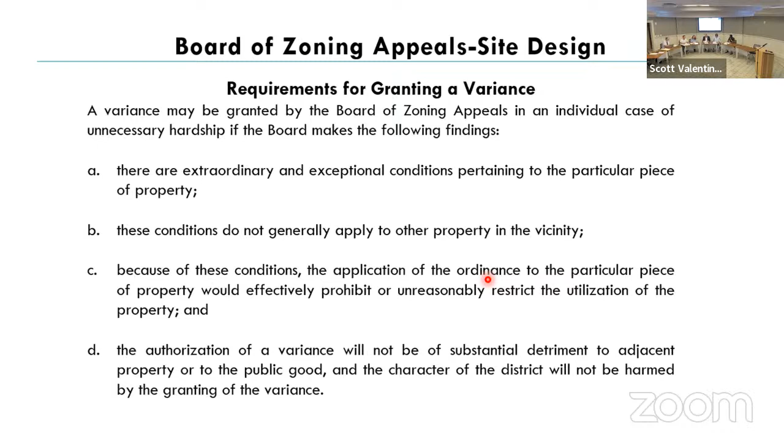So our first item on the agenda is item A1, which is a review of the minutes from the July, and the August, September, yeah, September 6th meeting. Has everybody had a chance to review the minutes? Are there any questions or changes required? If not, is there a motion? I make a motion to move to.

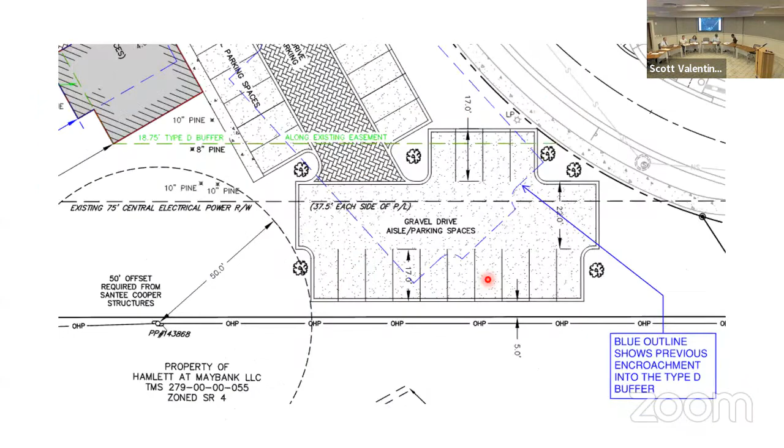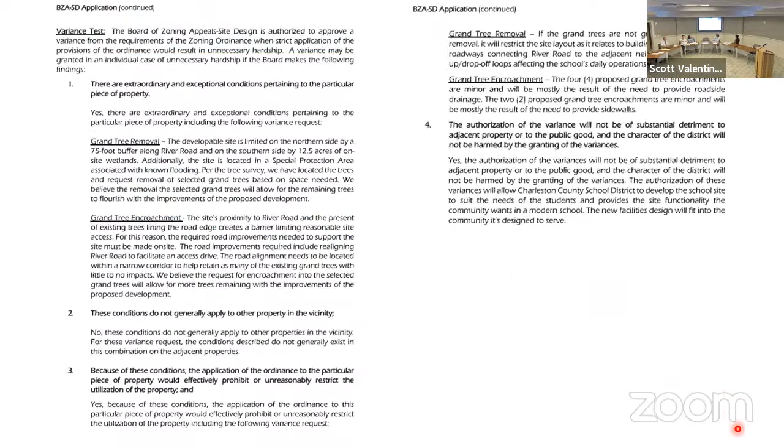Okay, River Road, James, or Johns Island. This is the application, and their letter explaining hardship. So we heard this case in March of this year, and I'll explain why it's back.

This is the residual lands within the Swaggart's Landing neighborhood district. That's a district where it's by right if you meet all these criteria, and you have to reserve an area that is to be developed as a mixed use district. Schools are permitted in that district, so the neighborhood is basically built out. I think there's a couple of lots yet to be built upon for single family homes, but as you can see, this area has roads stubbed out to it for future development.

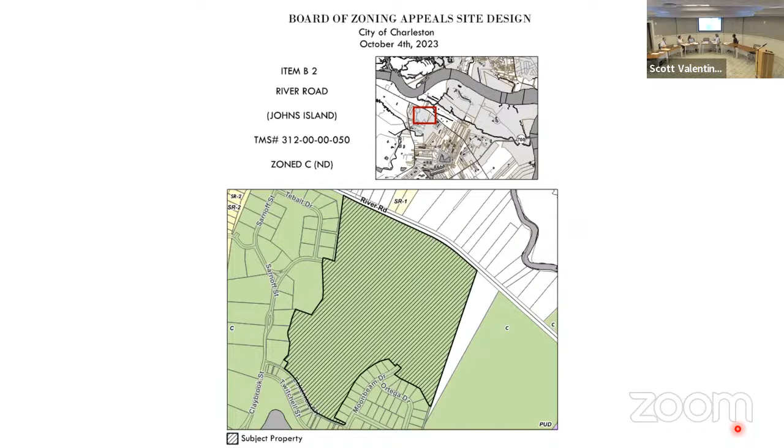Zone conservation, and that's a zone district that allows the neighborhood district to be developed by right. So you can see, this was pasture land about 20 years ago when the neighborhood district came to be and the original layout occurred. But the cattle left and it's now young pine, but there are a lot of grand trees scattered about, and a freshwater wetland, obviously.

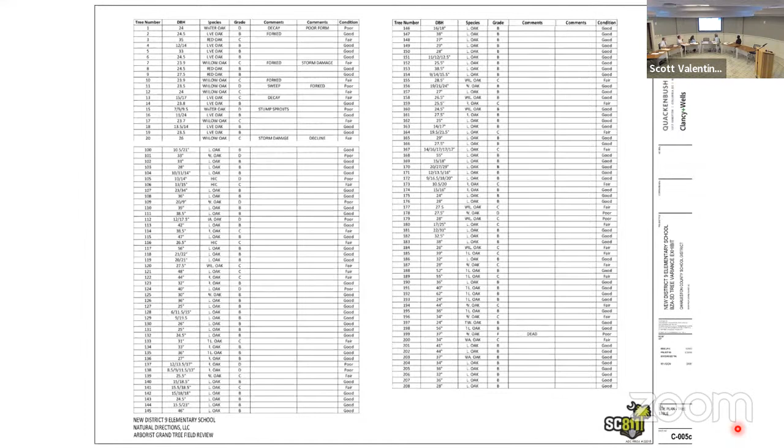This is just the grand tree master list of trees on site. So this was the previously approved site plan, and I'm going to use my little red dot. As you can see, in this scenario, we were introducing a roundabout that would connect this small piece of public road to the River Road roundabout planned. And then the school, obviously, and this would be a public road connecting over to this public road. And this is a bus lot, and at the time employee parking was going to be here. The bus employee office, and then the rows. Note that with the circle, the entrance to the parking lot was here.

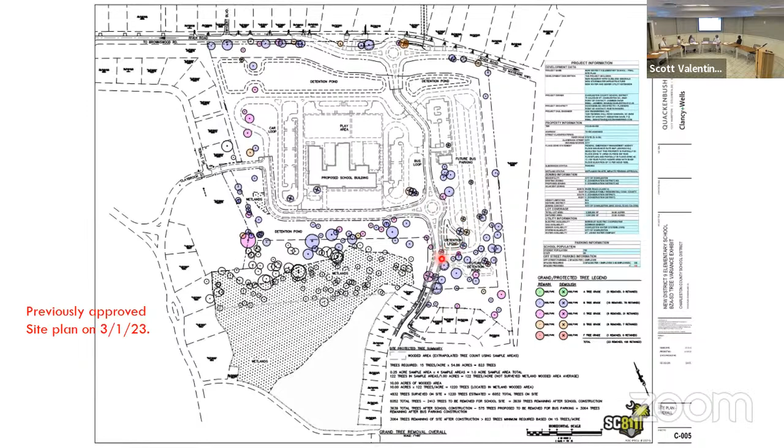But with the growth of the wetlands, that kind of tinkered with the existing layout. Unfortunately, the city's okay with the three-way stop public road, but then they'll have their bus entrance off of that intersection there. And in order to get as many buses and the capacity, they moved the office down and then the employee lot into this grove. And again, this road, if you were to try and swing out and miss the wetlands, there would be a pretty significant impact to the land use as well as grand trees.

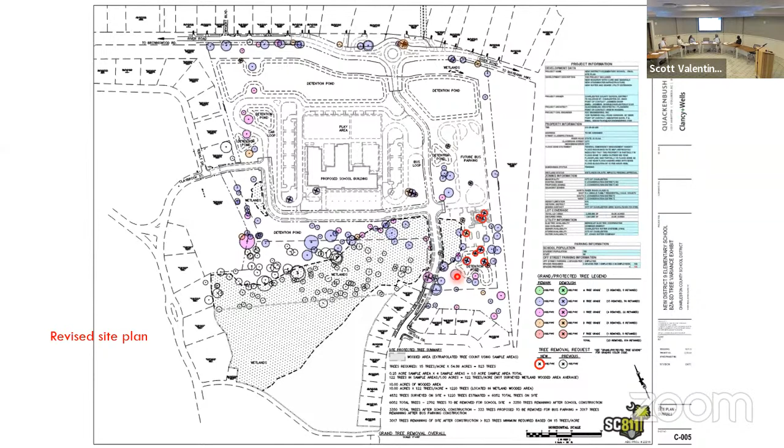So the 8 trees are those in red, and that's due to the change in the site plan. So again, the trees that were previously approved with the driveway here, and you all conditioned that some trees be preserved, and that was in March. This is now October's layout, and this is a low point in the road, obviously a wetland, and it kind of drains down toward the connection point.

So they have to get water off the public road, and they can't bring in massive amounts of fill to get it to go toward the outfall, which is this pond. So they have to weave it through, store it a little bit, and then they'll be able to move the water east.

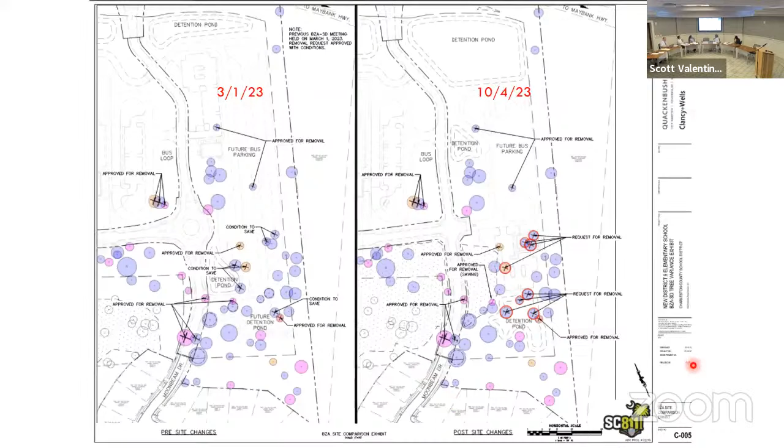I'll explain a little further. I was not comfortable with the request. So again, this is just a blow up of the 3-1 layout, approved for removal, condition to save.

Obviously, the road was going through there without the wetland encroaching south. And then, of course, the new layout - that's what they presented.

So just again, to why just 8 trees, there's a couple X's here, they were previously approved.

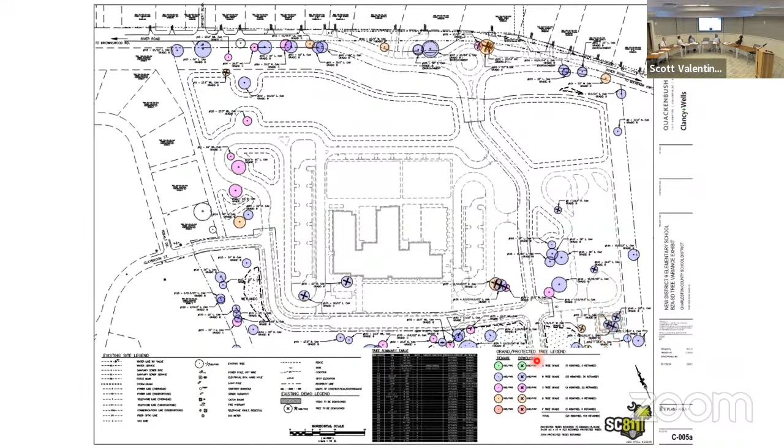So this is the exhibit with the tree numbers and the sizes. Again, you can see this is due to the sheet size, they kind of cut it off, but this is the new layout, the office. And this is the red - I'll explain the green, I'll explain, but they're the 8 trees being considered tonight.

So I blew up the top half. We have the bus entrance, the secured employee parking and the office. And then the buses will head into this area. We have a required buffer.

One thing I did fail to mention, go back to this - this line represents a conservation easement. That was agreed upon with the meetings with the neighborhood and what have you to create a buffer against those residents. So there's that constraint as well.

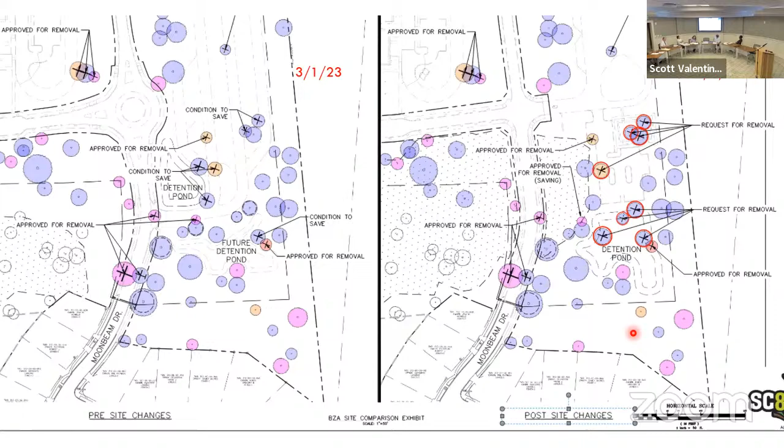So these are the 3 trees in the building: 149, 151, and 150.

This is the lower portion where they propose the pond. 4 Bs, 1 C, or 1 D.

I wasn't comfortable with that, so I put pen to paper, suggested a few things. Sebastian with ADC came back with this, and I'll be supporting this. So we sacrifice a 196, which I do not have a photo of, but we saved 3 Bs.

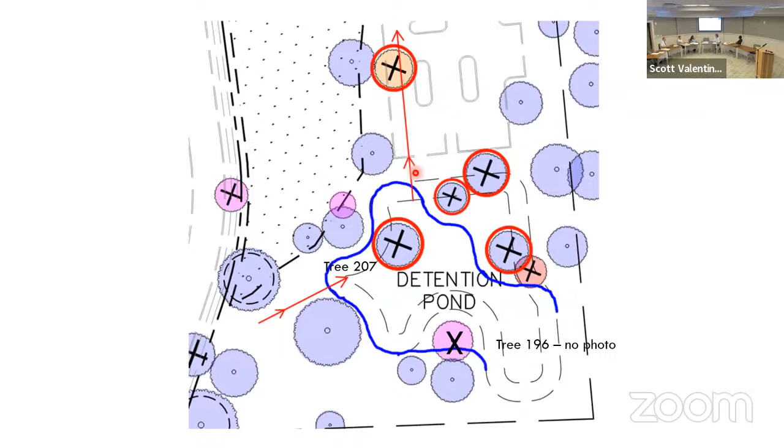And the pipe would come from the road through here into the storage and then head east into the outfall. That's tree 207.

So staff recommends approval with the condition to plant 194.5 caliper inches of native canopy trees on the project site. Must preserve tree 5, 6, and 204. Must use 4-foot chain link fences, tree protection barricades. Must have a certified arborist treat both grand and protected trees within 25 feet of any construction. And the landscape plan to be approved by DRB and tiers.

Right, thank you, Eric. Question.

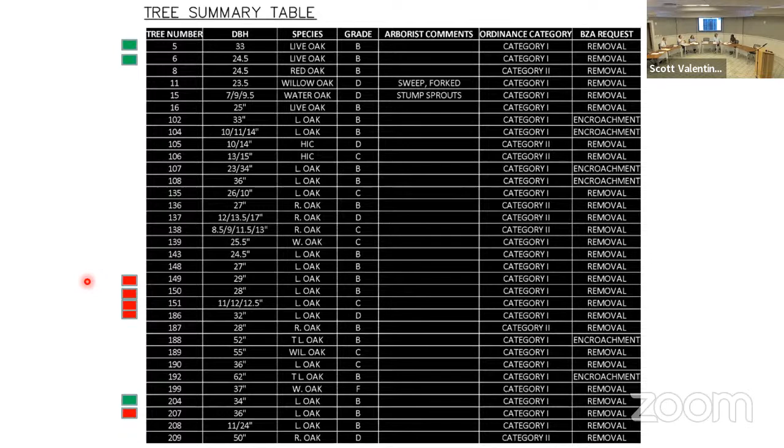So the dissection of the wetlands, is that a bridge over the wetlands? No, sir - I'll let the applicant speak more in depth, but it's my understanding, when you get into wetland impacts, there are certain thresholds you want to try and stay under, and they're staying under the required threshold, not to delay the project months out. But I'll let her explain.

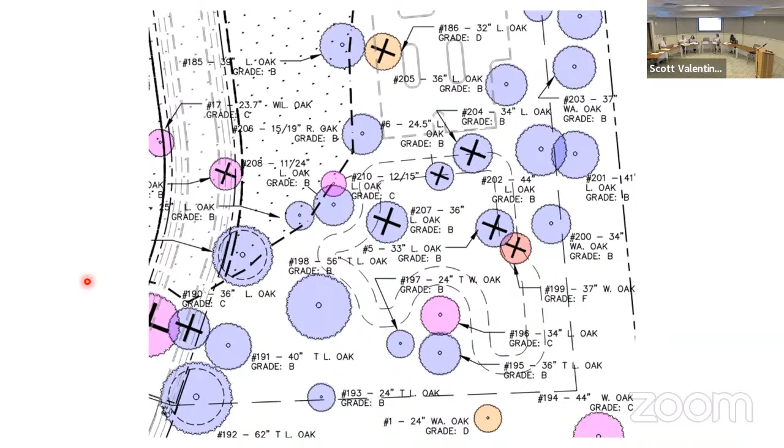Good, okay, thank you. Is the applicant present? Excellent. And I'll ask real quick, is there anybody present that is opposed to the application?

I'm Sebastian Davis with ADC Engineering. We're the civil engineers.

In general, this project came before you all, and we had a different layout, which actually had more buses stored on it. We went back and talked with the school district, and they agreed to sacrifice a number of buses to reduce the area that we were going to impact. So by doing so, it helped us come up with this particular plan.

So we did shift the bus parking - we started back a little bit. With more buses, there'll be more bus driver parking, so we had more bus driver parking on the northern half. By making the buses smaller, we were able to fit a smaller number of bus drivers in a smaller area.

The main constriction and the reason why we came back, as Eric had mentioned, is because of the growth of wetlands. If that had not happened, we would have kept with the current plan. So we tried to pivot and find the best solution to fit the smaller building and bus parking in the smallest area that we could, but also preserve the minimum number of buses the school district needs. We looked at all the different options about how to drain the low area, which does need to be drained to be serviceable. So we looked at it and came up with this option.

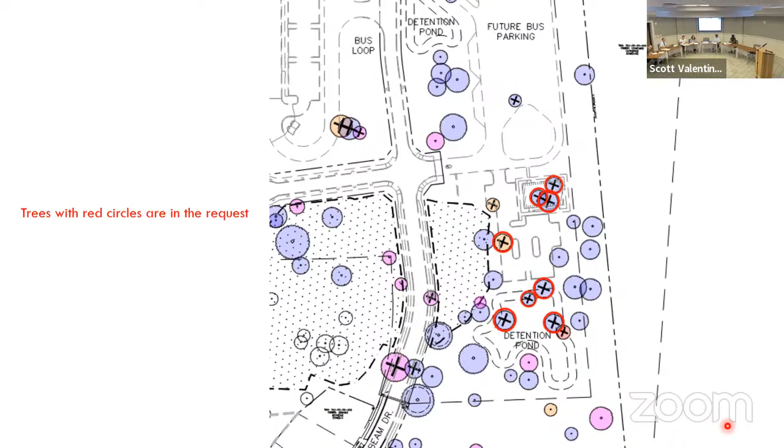I make a motion to move to approve with staff recommendations - that's 5 trees on it. I will second that motion. So the motion for approval by Amanda Barton and seconded by Paula Summers.

All in favor of the motion? In favor. In favor. In favor. Any opposed? That one is approved 4-0.

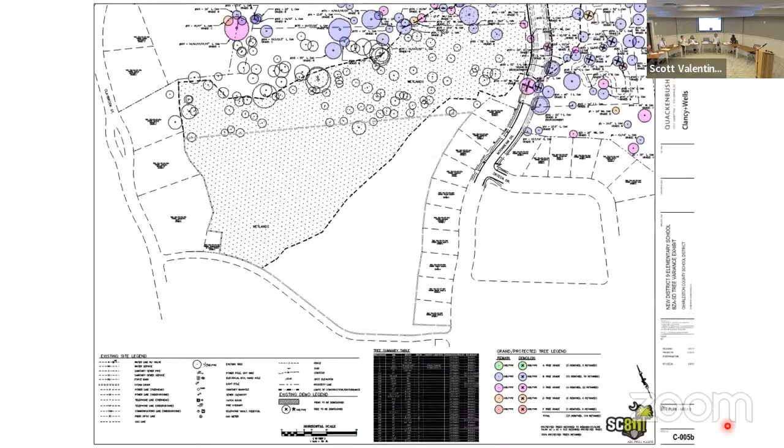Excellent. Would somebody let Jeff know? I guess he's allowed to come back in. Thank you, thank you, good citizen.

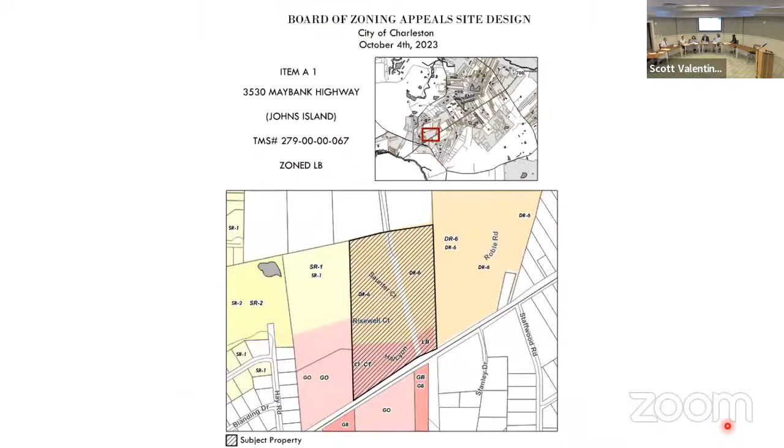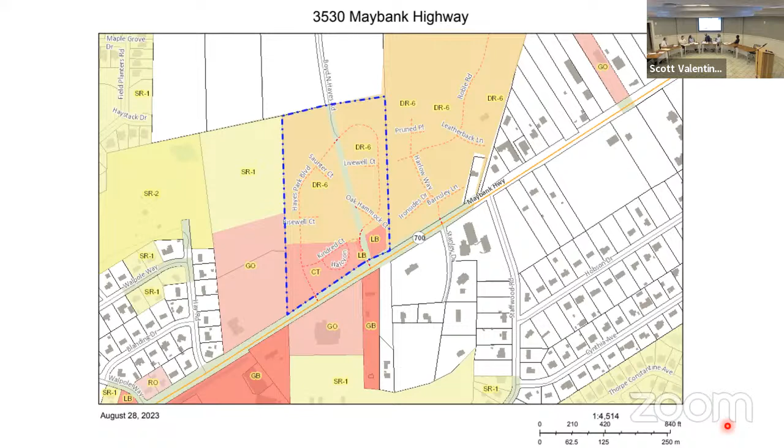Here's the application. The site is known as Hayes Park. So you've got residential, diverse residential, in the rear portion of the parent tract with a wonderful little village-like setting up front, commercial village CT, and this particular piece is zoned LB. This is it before all the construction activity began.

Note the existing 75-foot Berkeley Electric Co-op easement that runs on the eastern property line. This is a view of it from the street. The property line runs right down the middle of this easement. The property to the right in this image is also diverse residential and currently under construction - Middleburg Properties.

So this was the master plan brought forth, and I'll explain. In this plan, you see the proposed building was not encroaching into the Maybank Highway buffer. But at a later date, this came back to the Board of Zoning Appeals, and due to the curvature and geometry of the new road, which was like realigning Boyd Hayes Drive, a dirt road servicing a lot of residents behind this project, it made this little commercial piece a little odd shaped with the easement.

So they brought forth a variance to address two buildings encroaching into the Maybank Highway buffer. The one on the left, which is now constructed within that little village, and then this one - they didn't really have a use, but they figured with parking behind it, which DRB and the city wanted and would encourage, they brought that building forth.

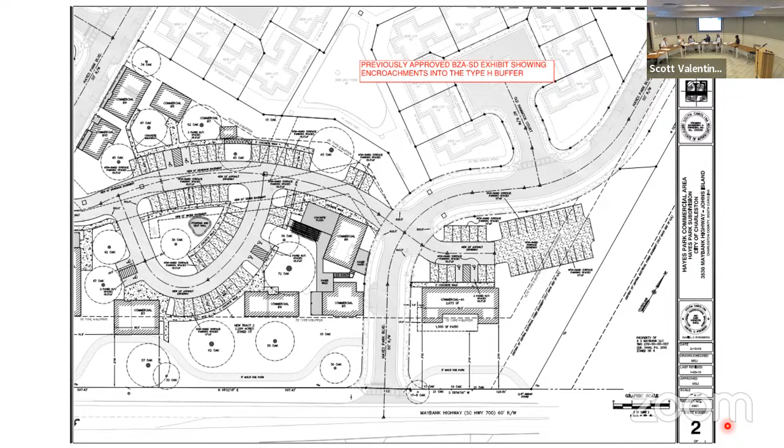They were just kind of moving forward, wanted to make sure they could get a building to encroach slightly into the Maybank buffer. Now that they have a developer looking at that property, the idea is for, I believe, a restaurant. Note that this building is about 110 feet long versus this one that was 82 feet long, but I made them overlay the previously approved encroachment into the buffer onto it, so the portion of the building in the Maybank buffer matches.

But now we have this incompatible zoning issue. To meet the parking requirements and to have a viable overall commercial district there, they are seeking approval from Berkeley Co-op to improve the easement into some parking. So that line with the green lettering on it is the buffer - you can see the 2 or maybe 3 points of the parking lot that touch almost on the property boundary or the right-of-way line. That's where they made some adjustments I've already seen to meet the 5-foot landscape strip there.

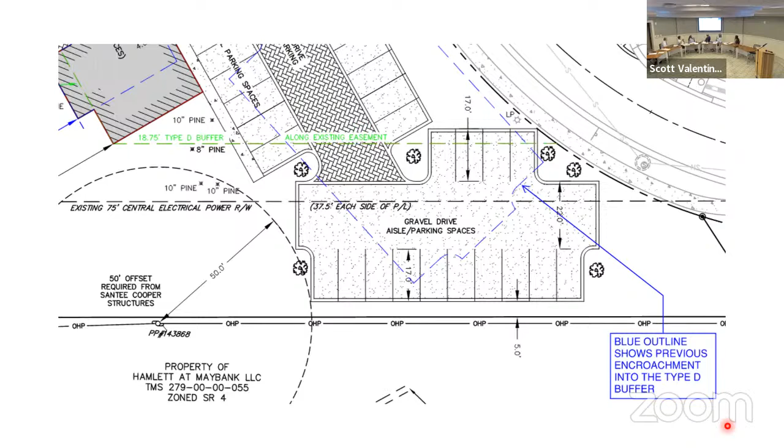So this is a blown up closer look at that. Again, you have the easement and then the 18.75-foot type D buffer on the development side, which would eat up quite a bit of their land, even if they were to pass through it and find some parking in the easement. But again, this is not an issue.

For the incompatible buffer, the city will recommend approval with a landscape plan that utilizes native plant materials for both TRC and DRB. They must maintain the non-protected and protected trees in the Maybank Highway buffer between the building, and supplement that with 5 live oaks. There is an overhead utility line that runs down that side of Maybank Highway, but we want to establish the next generation of live oaks. They must also provide documentation from Berkeley Electric Co-op approving the approved landscape plan.

All right, thank you. Is there anybody present that is opposed to this application? Is the applicant present? Would you like to speak?

Mike Johnson with Forsberg Engineering, and I actually brought the exhibit that Eric was referring to.

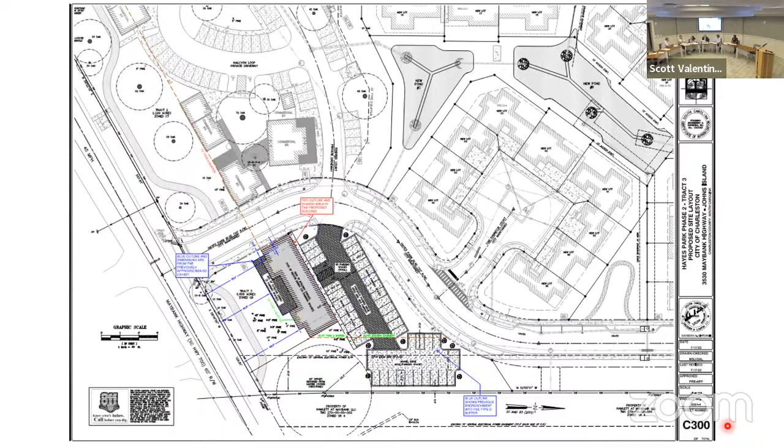So behind this multi-use path is where the pines begin. If I go back to here, so their building is a little distant behind that multi-use path. So we're going to keep all the 8-inch and non-grand trees. We'll allow little saplings to come out for some visibility, but that's the requirement to keep the pine and then plant the next generation of live oaks behind that walk.

Okay, interior to the site. Interior, yeah, on the north side of that multi-use path. Yep. All right, any other questions of the applicant?

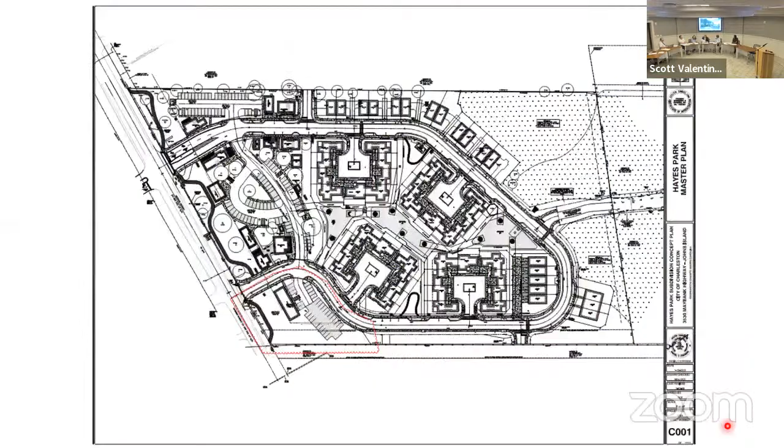Since there isn't anybody but the one person who wrote a letter that doesn't have an accurate location, and there's no support literature. There was one comment about... I think it was that one. Or maybe it was the other one. Right, speed, yeah, it's B1. So there was no negative comment on this, okay.

And the adjacent property owners are okay with it.

I agree, I'll make a motion for approval of staff recommendations and conditions. Second, spoken by Summer, second by Mr. Yuji. All in favor? I'm in favor. Aye, in favor. Anybody opposed? Approved 5-0.

Joe, all right, thank you. Thank you. Thank you. So then our next item would be item B1. Is that right? Go to B1?

Yes, B1. All right, B1 is River Road again, Johns Island, TMS 346-00-00-004, zoned PUD. Request a variance for section 54-327 to allow the removal of 10 grand trees. Request a special exception from section 54-327 to allow removal of 4 grand trees, and request a variance from section 54-330 to allow a reduced impervious construction setback near the bases of 3 grand trees.

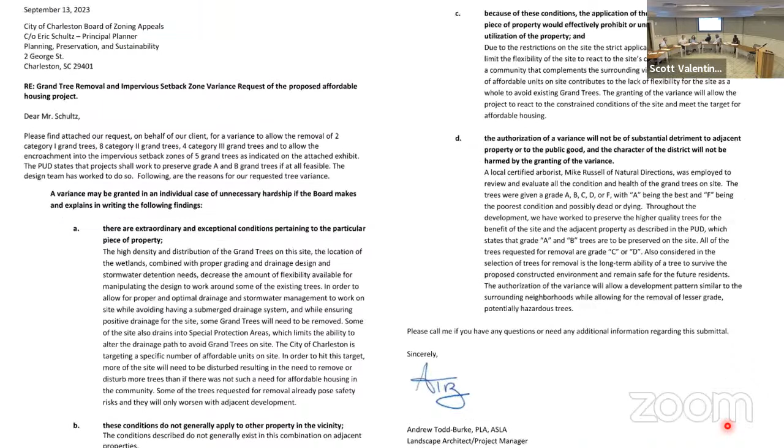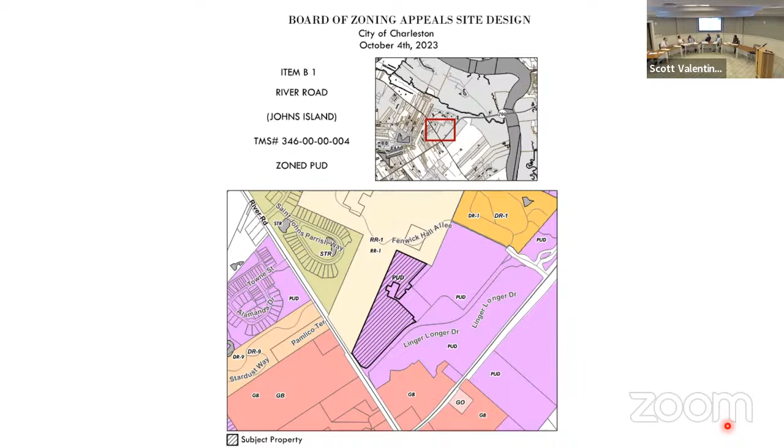So this is in what we know as the Village at Fenwick. It's a PUD. We have an apartment complex under construction. The purple tract to the right of the crosshatch tract is slated for single family home construction, and then the city tract has been further subdivided with the goal of providing two different affordable housing products. The first is this one with the crosshatching.

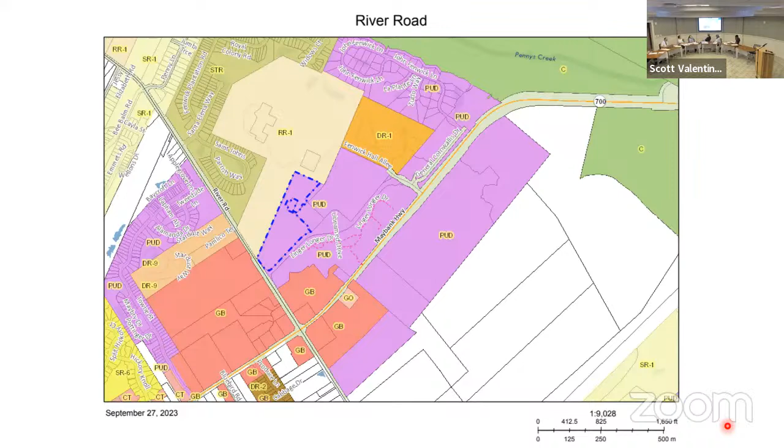So just to give you more context, the city viewed this as an optimal location for it. You have shopping, you have some services, banks, laundry, mail, post office, hardware, all within walking distance if you were to venture out. Wooded tract, as you well know, abutting Fenwick Hall Plantation.

So the city purchased property, and this particular piece of property is peppered with quite a few grand trees. We have a wetland that abuts River Road. The road to the south in this image is Bernice Robinson Road. The mayor just named that road not too long ago. We know it better as the Northern Pitchfork. It's under construction. The project is to provide 90 affordable apartment style units.

And then the gray area to the right, the residual land there, would be more of a townhouse product. So we ventured out. Obviously, they had a consulting arborist evaluate the trees. We visited the site a couple times. Parcel is in a basin, a drainage basin that heads in two different directions.

A portion of it heads west under River Road. The other half of it flows towards the Stono marshes to the east. The A grade trees are on the edge of the wetland and wetland buffer. So a couple massive trees out there.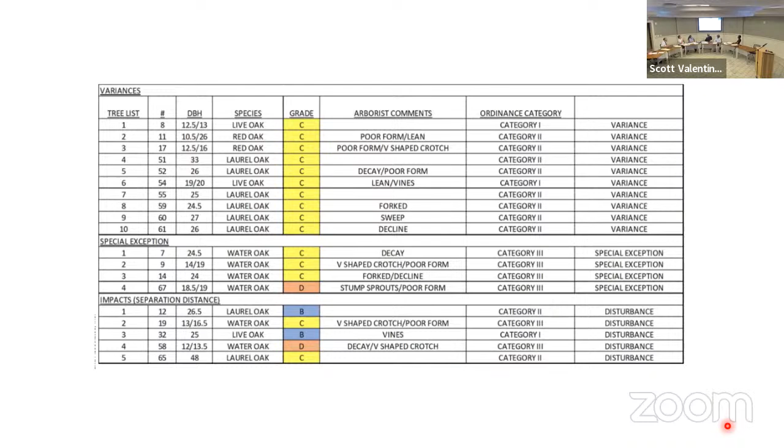We can, if you want, revisit tree by tree, or if you want to ask questions about the trees, we can revisit these are the photos. Very high canopies. Can you go back one sheet?

Map 54, 54. So this is a city sketch, which I'll build into my condition, but they have a really uphill battle with stormwater because they're in an impaired basin. They don't want to send much water that direction, but then they just have to meet all the other requirements.

These 2 red oaks, number 11 and 17, I revisited just last week. I was hoping they were higher quality - I couldn't quite remember, it had been several weeks since we were in the field - but number 11 is a split and it really arches away, the canopy is way up. Then number 17 is a double, and again they start to oppose each other, searching for sunlight. So I was hoping for better, but I'm still kind of stuck on this idea.

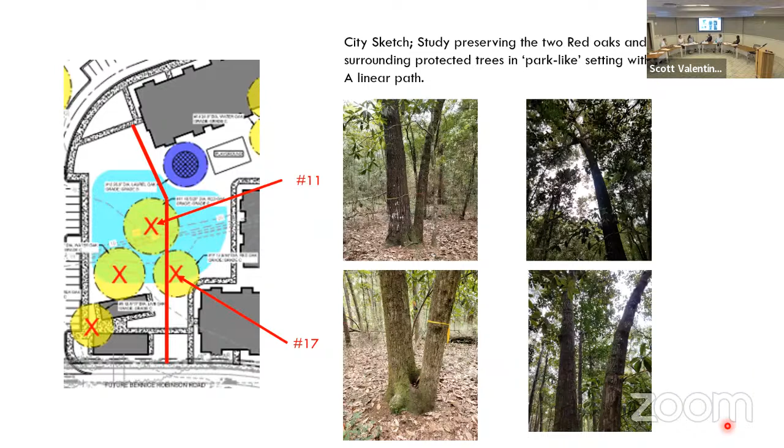But I was thinking - I couldn't remember if those red oaks were single stem or not. You're talking about the red oaks we're looking at in the photo - one has what looks like gravel at the base of it. Those aren't trees 11 and 17, or are they? Yeah, and then the one on the left is a water oak, the other yellow one behind the leasing center. I was trying to create a vista down between the residential unit and leasing center, and have your eye go to that B grade tree and create a space in there.

Any other questions of the applicants? With a second, or some ready to make a motion. Any other questions or comments? No, just second. We have a motion. So those are all C grades anyway that are in the retention area - yes. And I'd rather see more blues saved overall on the site.

I'll make a motion for approval with staff recommendations. For approval from Webb, second by Ms. Martin. All in favor? In favor, in favor, in favor. Any opposed? Approved. Thank you.

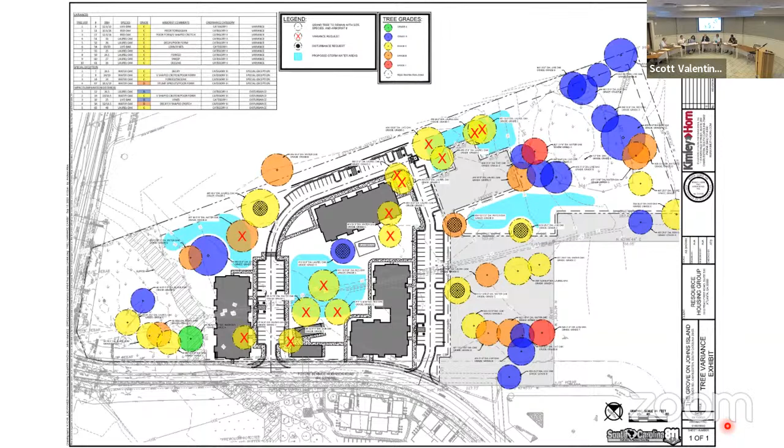Next, sorry, next to last - item B3. That is 1656 Savannah Highway, TMS 350-07-00-202, zone GB. Requested variance for section 54-237 to allow the removal of 2 grand trees, and requested variance for section 54-327 to omit the 15 protected trees per acre requirement. Owner is PMSC LLC and applicant is Kim Rickman.

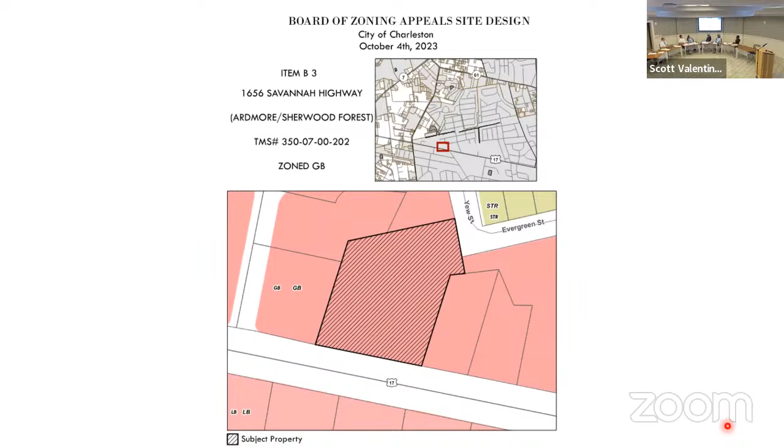So this is the application, their letter addressing hardship. And I'll stop with this trivia question - who can tell me what this site was before Chick-fil-A? Which one is it? It's still there - Evergreen Street, so that's Wappoo, right? Wappoo Road - nope, no, 17, but I'll give you more context.

Dee Peckers is on the corner there into that shopping area.

You don't remember Shoney's? No. Oh, I had the worst experience ever there. It's the only time I've eaten at Shoney's.

Shoney's went away a few years ago and Chick-fil-A came in, and as you see a trend around the city, very successful restaurants. So again, this was a redevelopment. A lot of the trees are young planted trees, but when they get to 8 inches, they are protected. We don't say just because they were required by the city to do a parking lot, but when they grow. So they have an issue with capacity in their drive-through.

This is a view from that little drive into that adjacent shopping center, looking at the newly planted trees and then some trees that existed on the common property line. This is the one lane, and the one lane at the window. So again, you can see newly planted trees, relatively new planted trees. How many years? 2010, so 13 years.

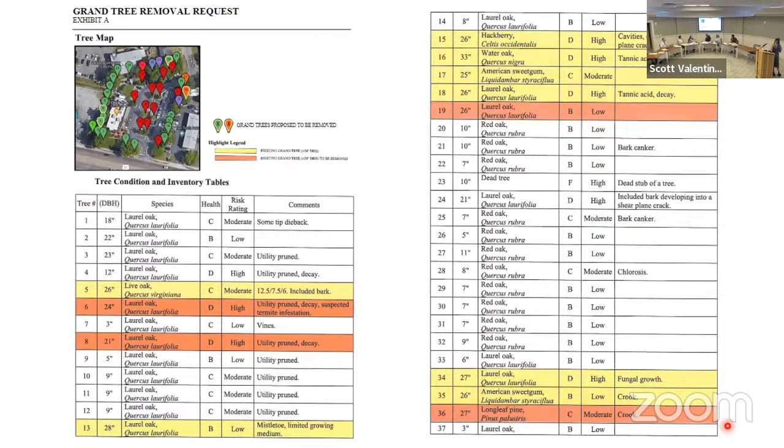And we can't do anything about it, but it's ironic that you probably don't need all that parking, especially with the amount of drive-through. A new tree will be planted in that island opposing the other one.

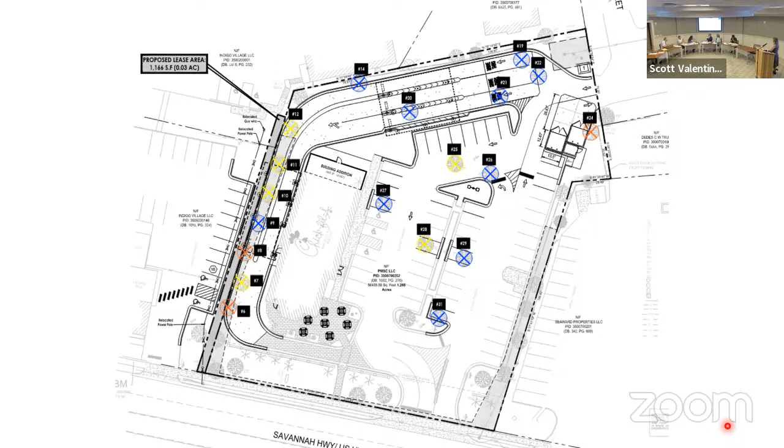Okay, we'll close this application to the public and open it to the board now just for discussion and questions. Thank you for the presentation.

I'll start and say that yes, the traffic does back onto Savannah Highway, but typically only when I'm trying to get to Costco or come downtown. But yes, I drive by that frequently and it is very busy, so anything that could be done to get cars off the road would be positive for the whole area.

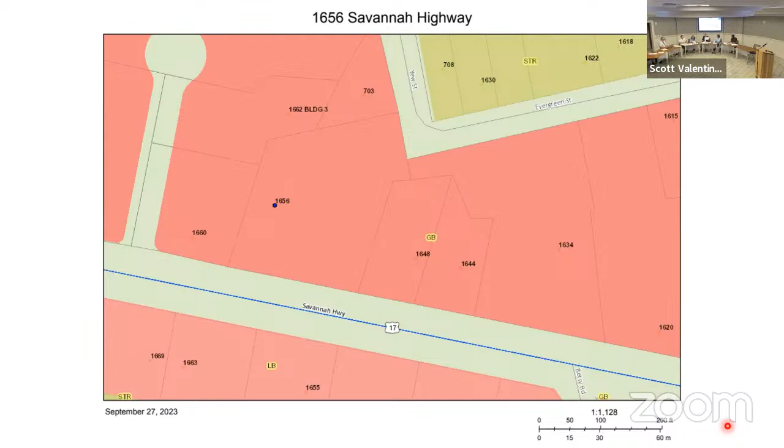I think when Shoney's operated, we didn't have the connection to Evergreen. We created that extra connection. It's vital, it's the only way to get to the stoplight going out.

I think we've got an applicant that's agreed to the city's change. There's no opposition, so if there are no further questions, is there a motion? If it had backed up to residential, then I would have asked if they talked with or met with the neighborhood. But I think it's fine in this case, and we didn't have any letters or attendance. Correct, nobody wrote in.

I'll make a motion to approve with those recommendations. Motion for approval from Amanda Martin. Anyone second? I'll second. Seconded by Mr. Webb. All in favor? In favor. Opposed? One opposed, Kelvin opposed. It's approved, 4-1. Thank you.